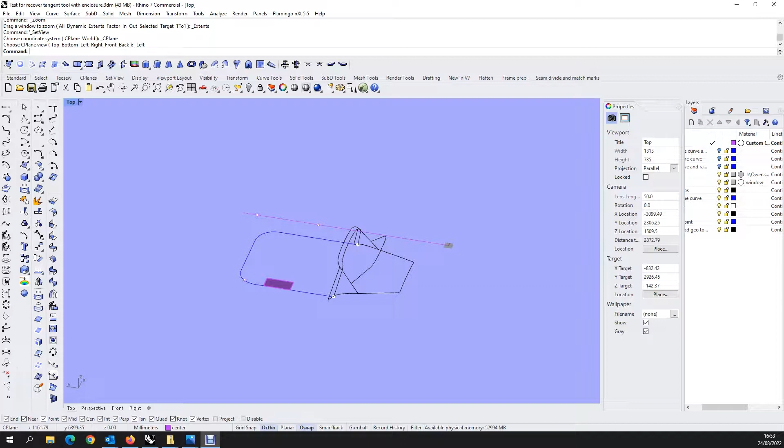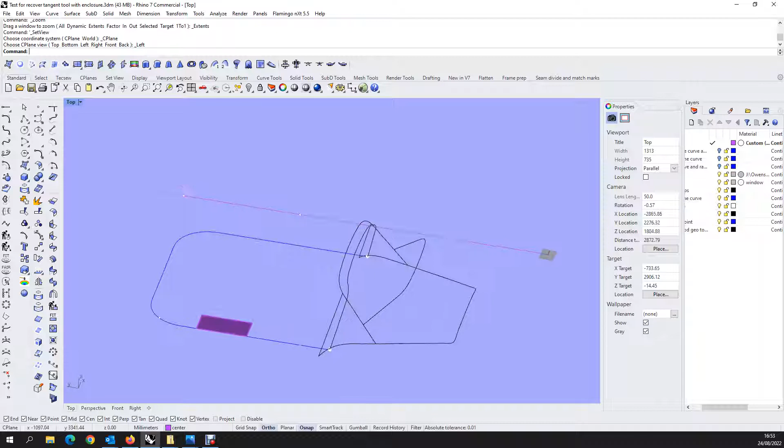Okay, so I'm just going to show you what I'm working on at present. This is in Rhino and it's with Grasshopper. This is basically data for a spray hood recover - the bottom edges and the frames, and also the perimeter curve. I've marked where we would ideally want the rear bar and the forward bar of the enclosure.

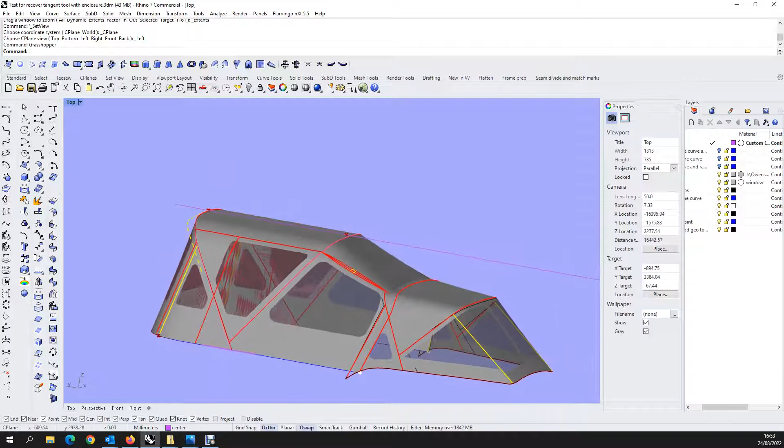Let's go. Through that all being on the correct layers and the geometry being picked, that's auto-generated. Okay, if I was to move that point, I can regenerate the cockpit enclosure.

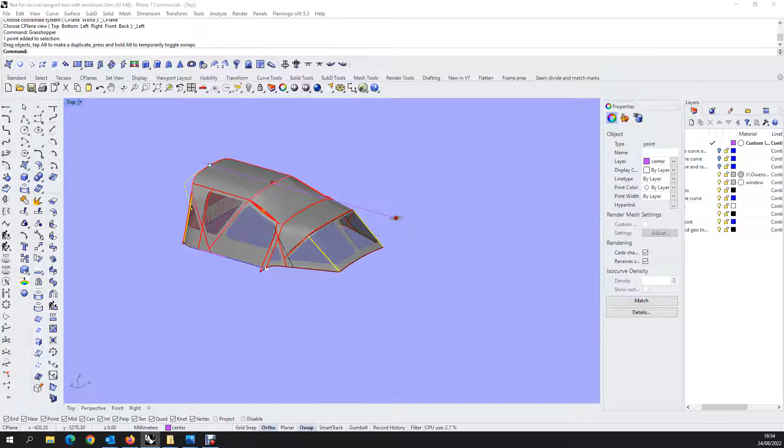I've got lots of control over the spray hood, so I can modify the windows. The yellow curve can be adjusted there - that's just a guide curve for the ISO curves on the surface, and that can be adjusted.

So we can, for example, change the color. We can change the spray hood from 2 to 3 windows. I can adjust the width for the front window. I can adjust the width for the pillars.

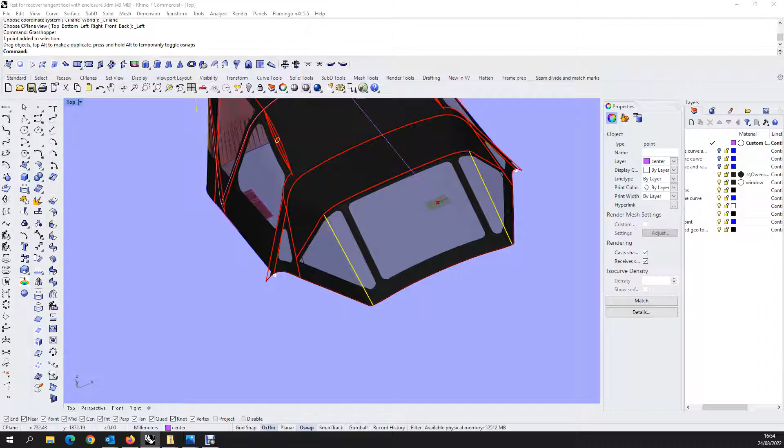I can do similar things for the cockpit enclosure. I can decide whether I want a window in the wings or not, and I can change these radiuses, these settings. I can change the height of the window here. Basically, we try to build in anything that the customer might ask us to adjust. If I don't want filleted corners on the windows, I can take those out.

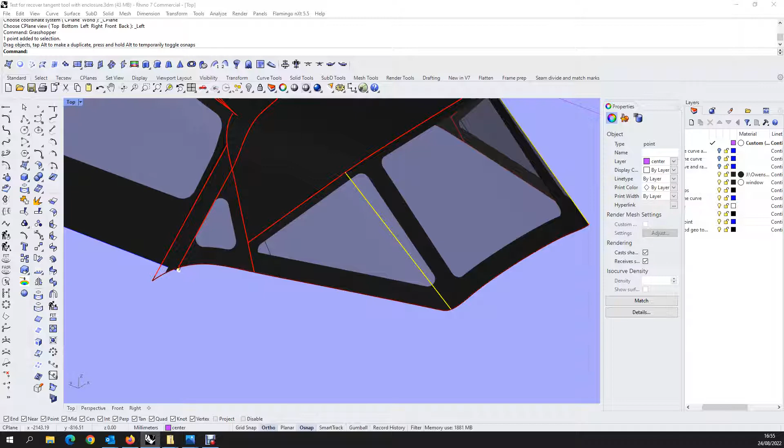So let's move on to the cockpit enclosure. It's a work in progress, not finished. So if I want to pick up the height of these - of the enclosure - whoops, wrong view.

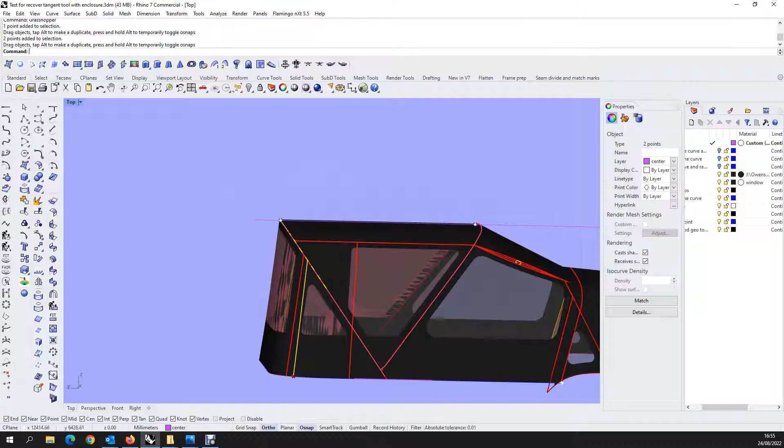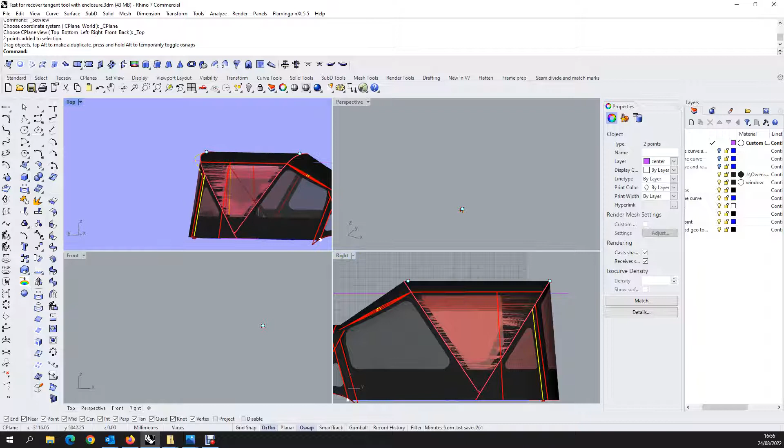I can adjust the enclosure. Yes, it'll take a few seconds to draw, but that's not a problem, because it would take a long time manually.

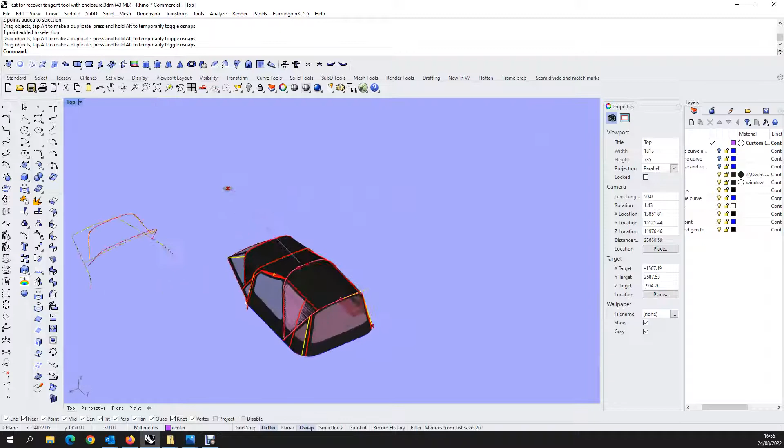What you can see in the background here is we're looking at auto-flattening this and adding seam allowances and one thing and another, as we do for the Bimini software we've written.

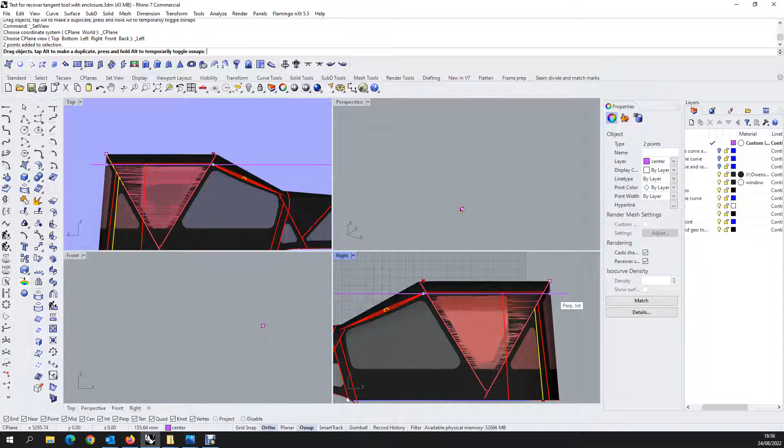So again, if I want to lower the height, that's just lowered the height now. Okay, we will end up having to debug this - that's part and parcel of the process.

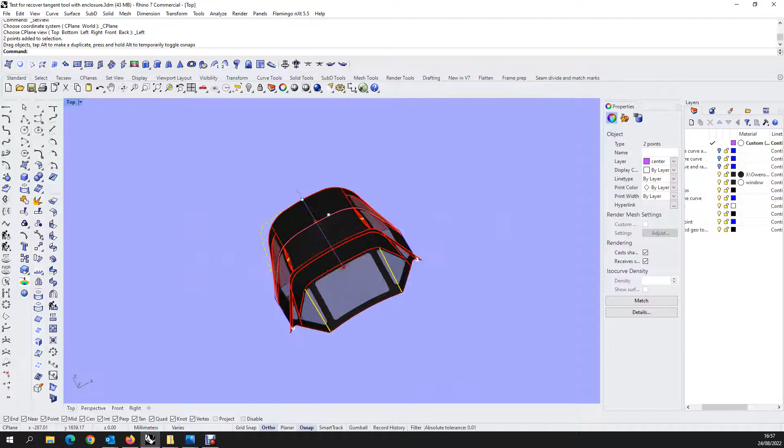So I can change the - so that's a guide curve if we wanted to match the curvature of the spray hood with the cockpit enclosure frame. That's a guide curve.

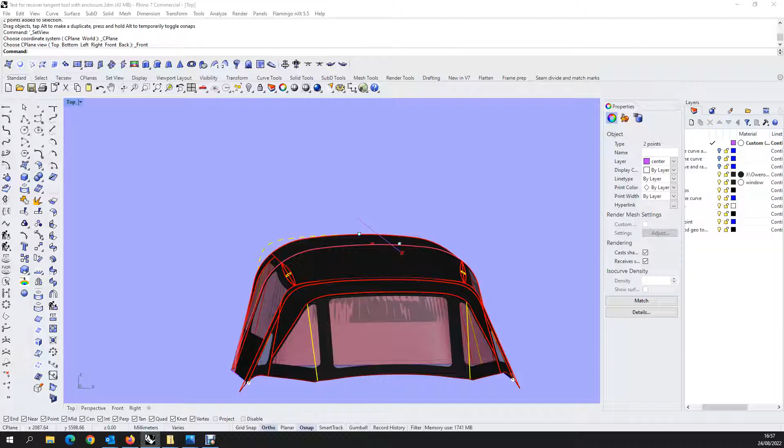So I can change all the parameters on there - I'm going to tighten up the corner radius, and take that out. It'll take a few seconds to recompute. I'll put a tighter radius in there, so that's if we're looking to match what we're doing with the spray hood.

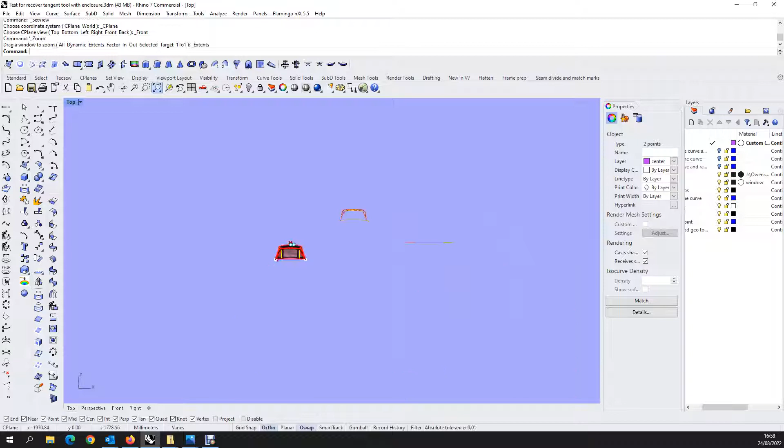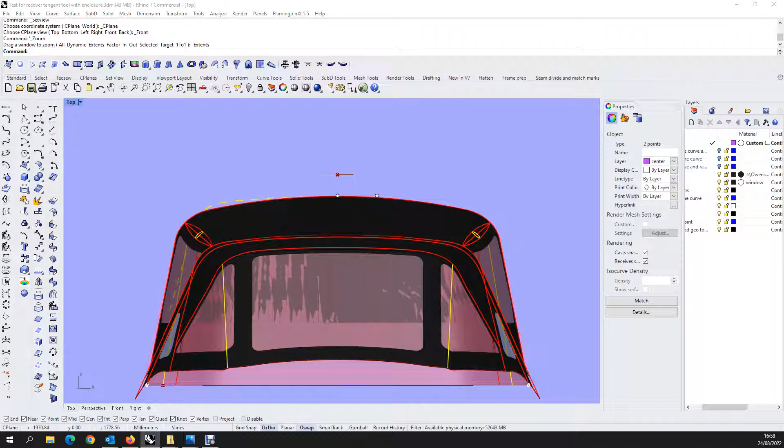So if I do not want to narrow the frame so much, you'll find that this will push out now. Obviously that doesn't look very nice. We can adjust it, we can bring it in, we can soften that corner radius, we can add more curvature to the top, and we have the yellow line as a guideline.

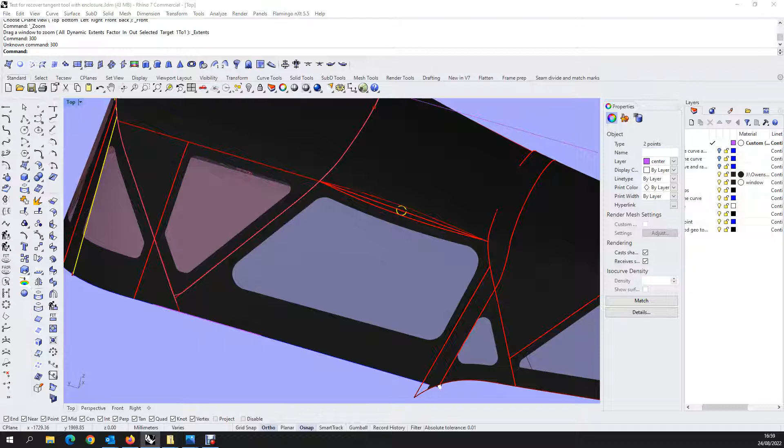Here, if I want to move the foot in terms of the winch - if I'm trying to clear the winch on here, I can adjust the frame. So if we look in this area here, I'll recompute in a minute, you'll see the frame will change.

So it's changed - the mounting points come further forward, configuration's changed. I can adjust the windows.

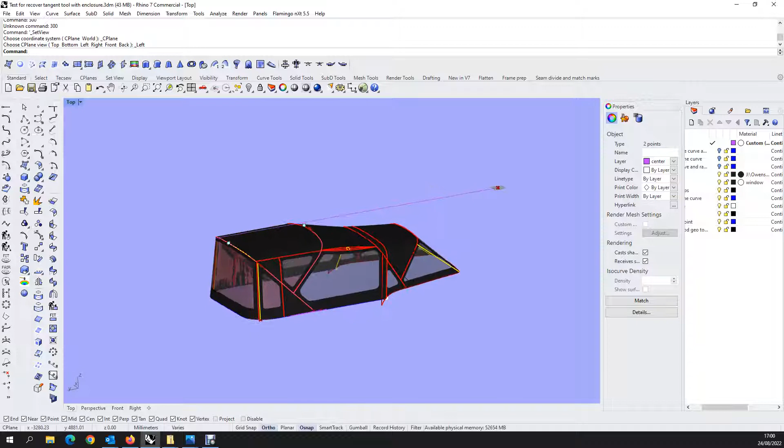Okay, so you can just see me changing a few settings on here. I can move the zip positions. I can narrow that back door, and obviously adjust it at the top as well.

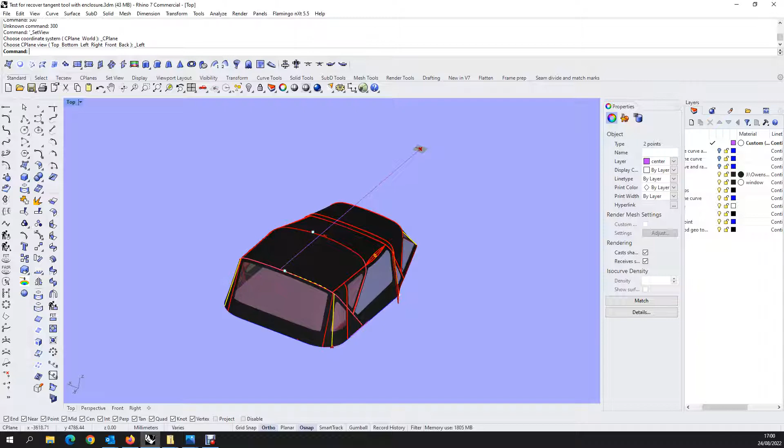Okay, so lots of control over what I do. We can adjust these windows as well.

Okay, so that's just a little demo. As I say, we will be looking, or I will be looking to work on auto-producing the production files for this as well.